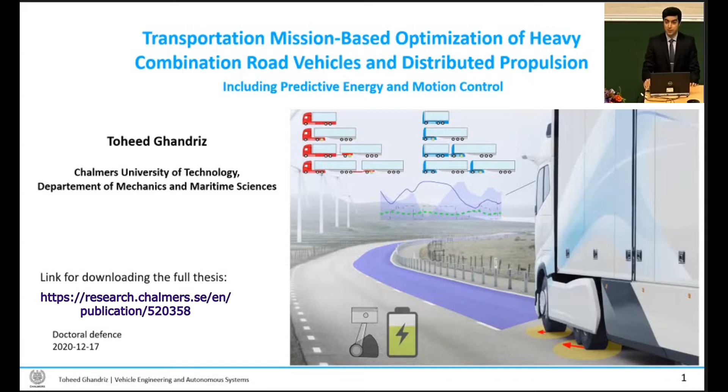The title of the thesis is quite long. Let's see what the thesis is about.

It is about road-heavy vehicles, which are powered by internal combustion engines using diesel fuel or by batteries using electric energy.

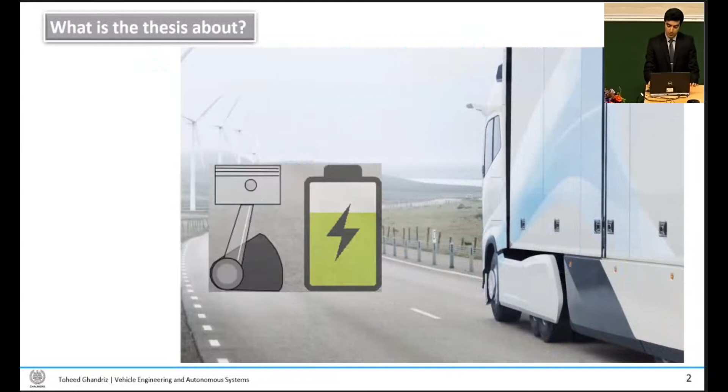They come in different sizes, driven by humans or by automated driving systems without human drivers. Electric-driven axles are allowed in any unit of these vehicles.

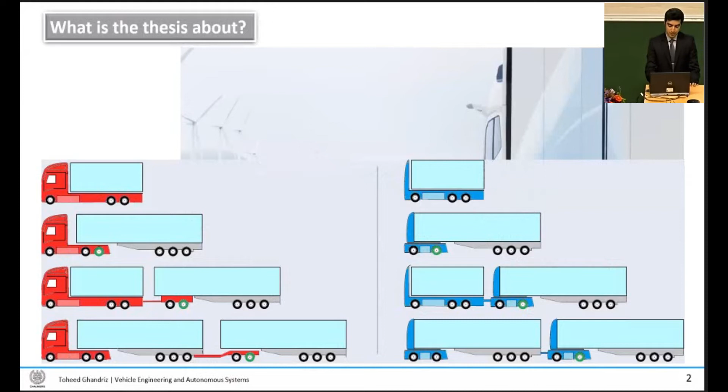These vehicles are designed in relation to the infrastructure and operational environment, and infrastructure includes charging stations and loading and unloading schemes.

This thesis considers optimal control of energy for these vehicles, where vehicles are aware of road elevation in front of them and decide optimally the velocity, optimal state of charge, optimal gear ratios, and transmission ratios.

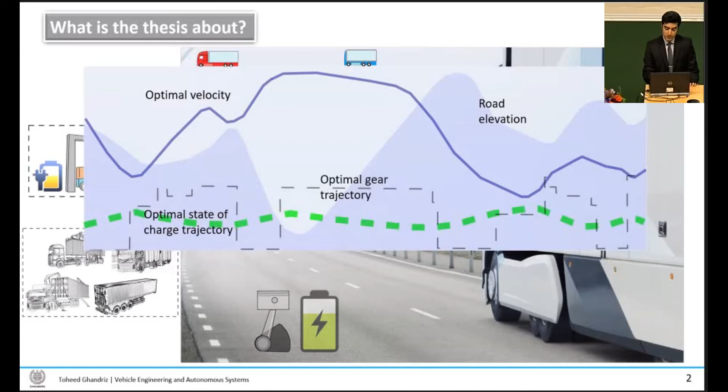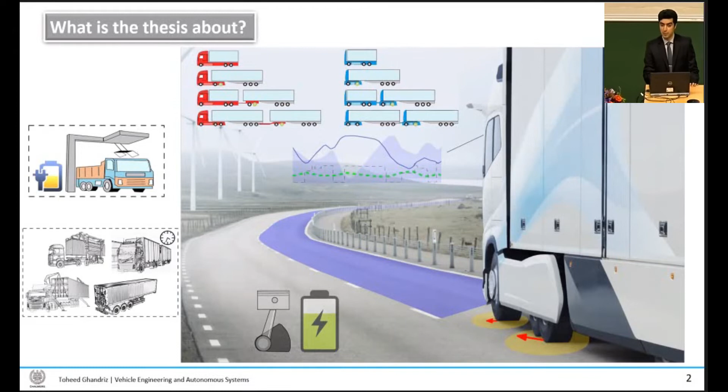The vehicles are also aware of the coordinates of the road, and they plan the distribution of forces between axles for each individual axle, with the purpose of motion control combined with energy management, or separately.

The main research questions can be formulated as follows: how the efficiency and profitability of road freight transportation can be improved when we allow electric drive units on any unit of the vehicle.

And how the fleet vehicle propulsion optimization is coupled with the operational environment and infrastructure.

Also, how can the longitudinal and lateral motion of these vehicles be optimally controlled, considering minimum energy usage and safety? These questions apply to both vehicles with a human driver and without a human driver, driven by automated driving systems.

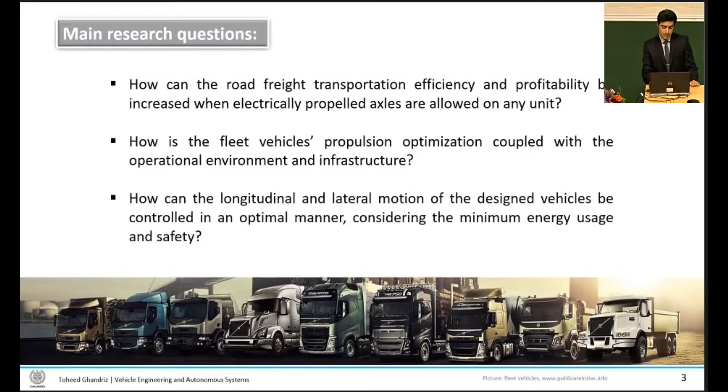Answers to these questions help us enhance road freight economy, transport, and energy efficiency, and road safety, which are the motivations of this work.

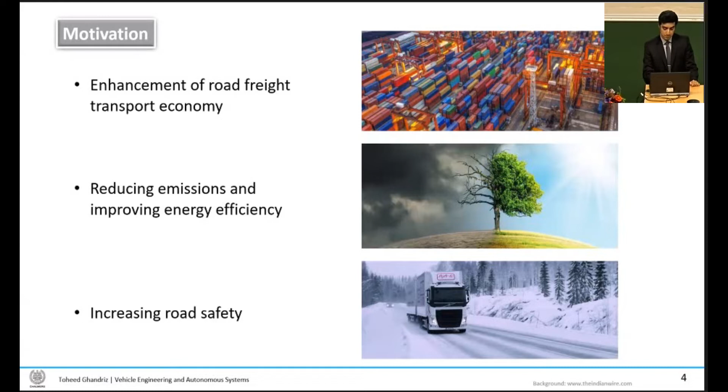Why is enhancement of road freight transport economy important? Road freight transport is responsible for about 75% of land transport in Europe, which is increasing.

This increasing demand, together with pressures from regulators to fulfill environmental standards, increasing customer expectations, and availability of new technologies, creates a competing market.

These pressures are in contradiction to reducing the cost of vehicles. On the other hand, having efficient, cost-efficient, and profitable businesses and vehicles is the priority here. So vehicles can be successfully accepted into the market if they show less cost and are cheap.

Two important sources of future revenue growth in the truck industry include new technologies and freight volume growth, and competitiveness of new transportation solutions depends on development and implementation of new technologies.

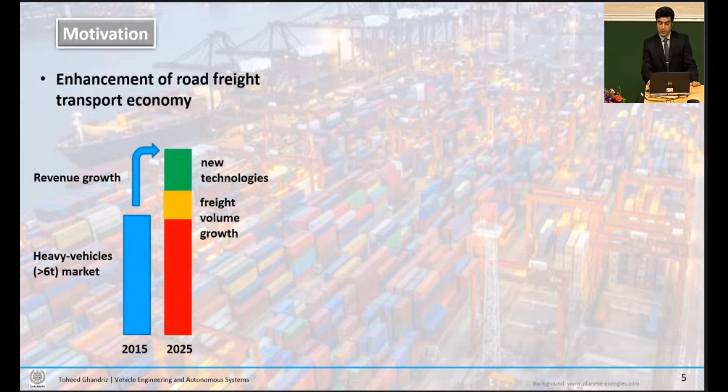These new technologies include vehicles without a human driver driven by automated driving systems, electrification and alternative powertrains and fuels with low prices, and also implementation and use of longer and heavier vehicles in transportation.

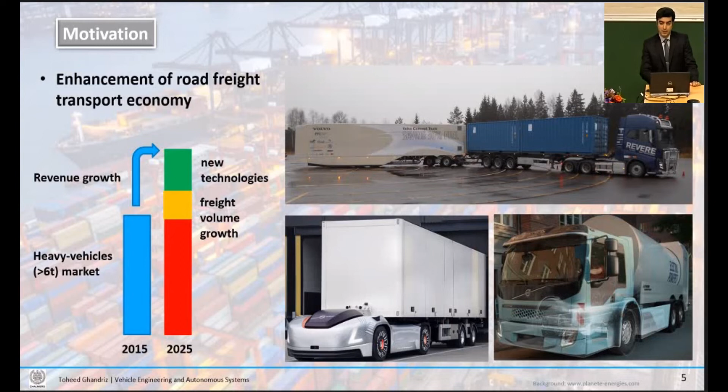Longer and heavier vehicles are good for a wide range of transportation assignments, and they are cheap and efficient per unit of freight transported.

There were two case studies performed in this thesis to demonstrate why longer and heavier vehicles are important and good.

Therefore, there is high utilization, and for high utilization, a vehicle with lower operational cost is the best choice, which in this case is a longer and heavier vehicle.

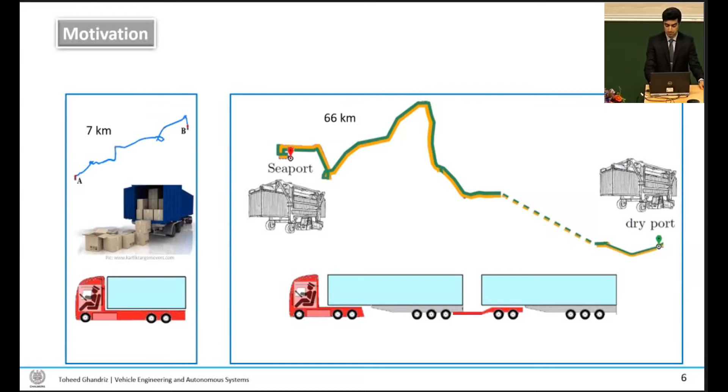Moreover, these emissions are increasing because of increasing traffic. Therefore, implementation of new transport solutions is important.

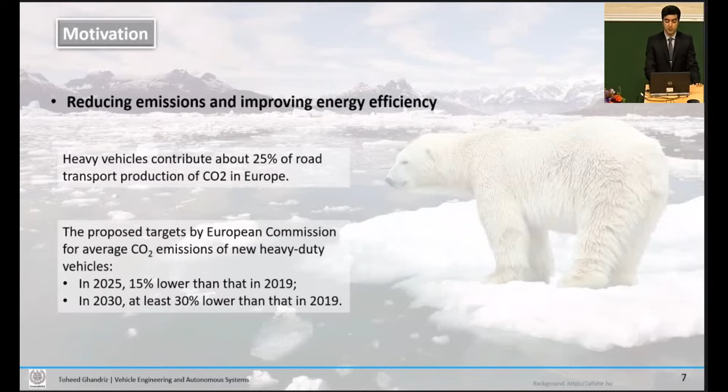Also, the dynamic motion of heavy vehicles and multi-trailer vehicles is different from passenger cars because they are heavier, longer, and have articulation joints.

And also, the critical situations created by these vehicles are more serious and different.

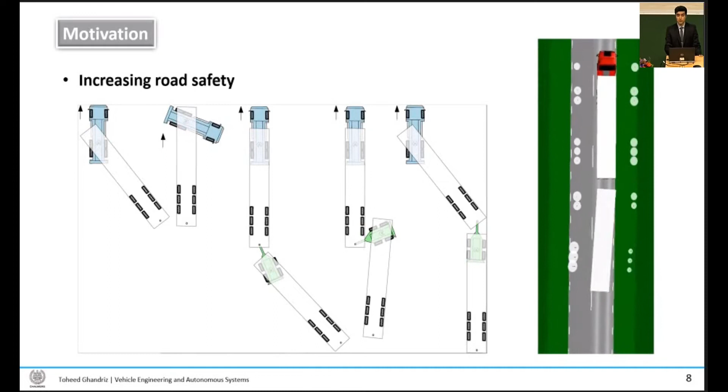That emphasizes the importance of developing new control strategies to avoid this situation.

To solve these problems and answer the research questions, this thesis used mathematical models and optimization methods. Mathematical models included total cost of ownership, models for multi-trailer vehicle lateral and longitudinal motion control, and simulation. Also modeling for powertrain, charging and battery state of health, operational environment, and operating cycles.

In the thesis, there were a series of optimization problems solved, including minimization of total cost of ownership, which was solved using derivative-free optimization because the cost is non-smooth and non-linear, and the design variables are discrete. Also, non-linear optimal control methods were developed for energy and motion control, solved using direct optimal methods and by converting them to linear programs, non-linear programs, and mixed integer nonlinear programs, which were solved by sequential programming. Also, for several problems in the thesis, dynamic programming has been used.

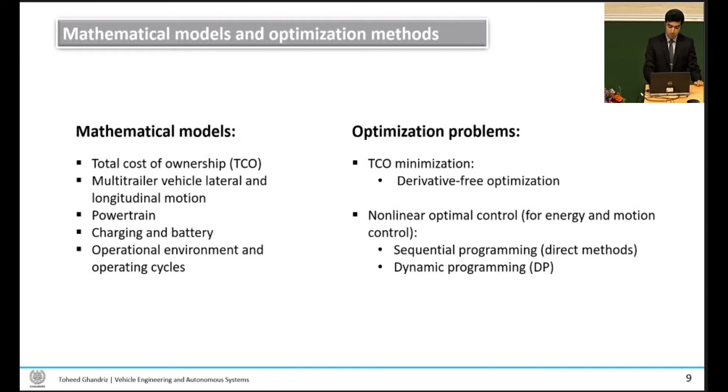The total cost of ownership here includes operational and depreciation costs. Operational costs included diesel fuel, electric energy, driver, vehicle maintenance, taxes and insurance, discount rate or interest, and transportation mission management system in case of driving automation and vehicles without a human driver.

Also, the depreciation of purchase price included vehicle chassis and powertrain components, as well as investment of infrastructure. TCO calculation also included the economic lifetime and rest value, which were different for different components of the vehicle. For example, for the last replaced battery, which might have a better state of health, the rest value was different.

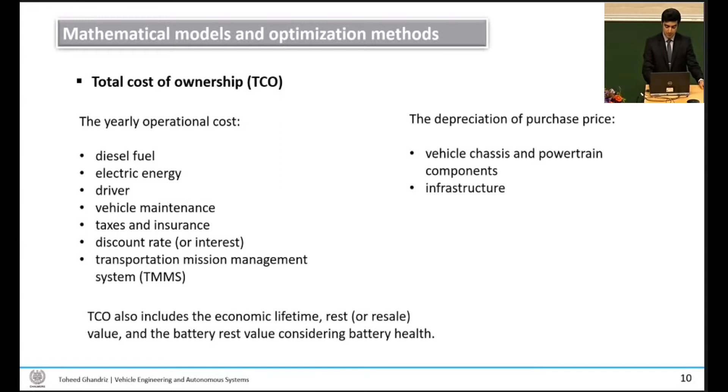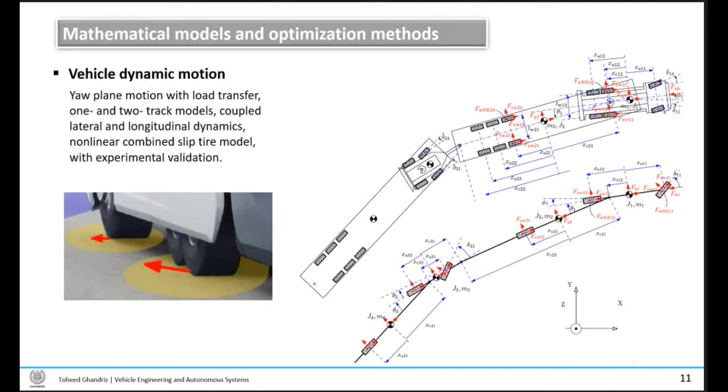Vehicle dynamic motions also needed to be modeled. In this thesis, vehicles with 1 and 2 track models were used. The important dynamics that needed to be captured were actually coupled lateral and longitudinal dynamics with nonlinear effects of combined slip tire models, which were needed for combined optimal control of lateral and longitudinal motion. As we can see in the right figure, there is a schematic of these figures, 2 track and 1 track, where 1 track is simpler and shows very close dynamics to the 2 track models.

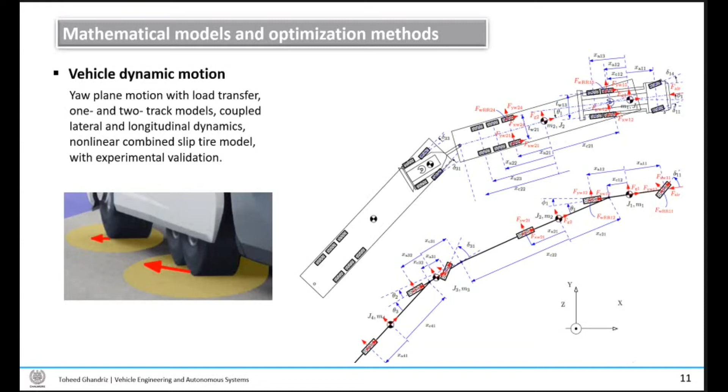This resulted in very large differential algebraic equations, which were validated using measurement data. The measurement data were obtained using this vehicle, which is an A-double consisting of tractor, semi-trailer, dolly, and semi-trailer.

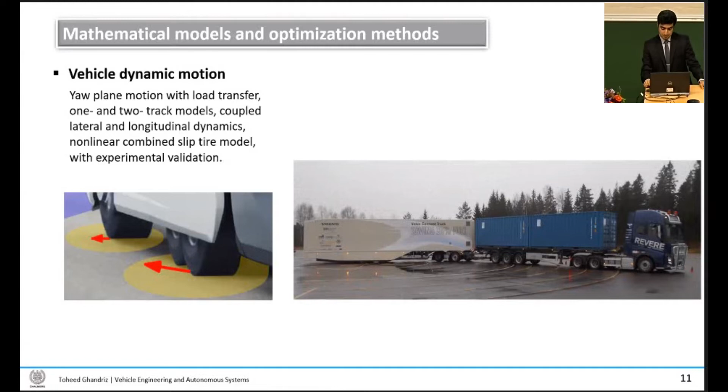The simulation results and measurement results showed a very close relationship, and here you can see an example of yaw rate for different units in a braking curve maneuver, which are quite close in relationship and acceptable for our purpose in this thesis.

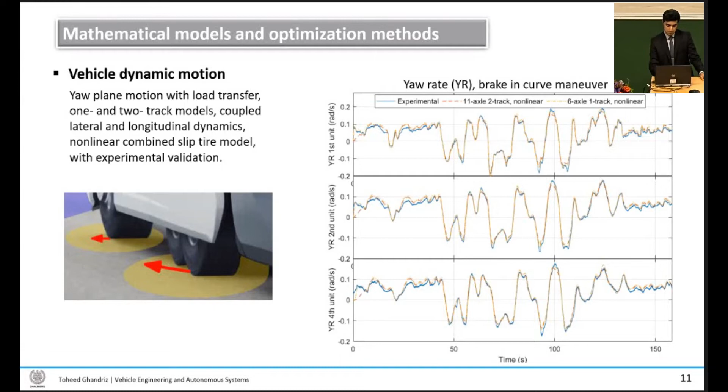Moreover, the thesis needed to develop powertrain models for conventional, battery electric, or hybrid powertrains. Here you see a schematic of the parallel hybrid powertrain. Each subsystem of the powertrain has its own power losses and energy losses models.

For example, we use here efficiency, which was measured for these components for the internal combustion engine and electric motors, together with limits on the torque as a function of speed of these components, which were used for evaluating the power loss.

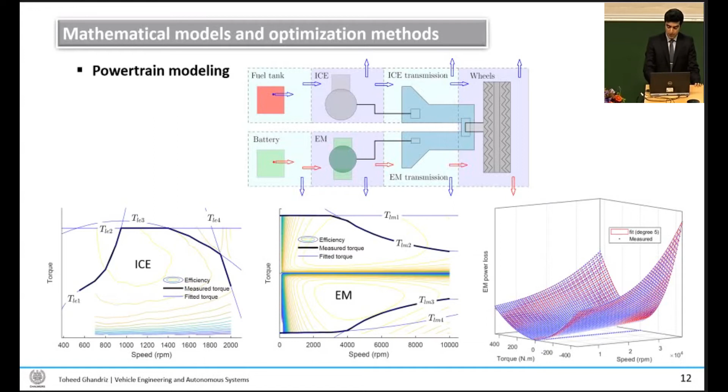Also, operational environment and operating cycles needed to be modeled, which include a transportation network roadmap consisting of routes, customer locations, and topography of routes, including elevation, coordinates, and curvature, which were obtained either directly using available maps or by performing measurements.

A well-stated problem is a half-solved problem. If we have a good description of the system dynamics and operational environment, and we know how to solve the nonlinear optimization problems, then we can handle a series of different optimization problems with different cost functions and constraints. The challenge is, however, how to handle them efficiently and in real time, if they need to be handled in real time.

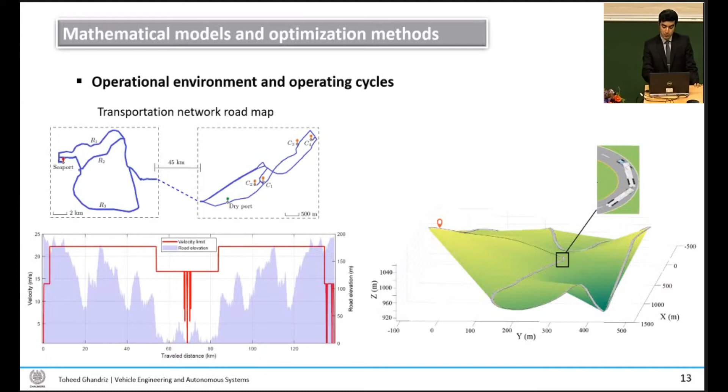As an example, we see an optimization problem here, which tried to answer the first two questions: integrated vehicle infrastructure design. The first two research questions were how to improve the efficiency and profitability of the transportation solution using electrification, and how it is dependent on or relates to the infrastructure.

Here, the design variables are vehicle types, vehicle components, and infrastructure. The vehicle components included choice of powertrain source of power, for example conventional, full electric, or hybrid, and then the size and type of electric motors and their location and number of driven axles, type and size of batteries, and size of the internal combustion engine.

The infrastructure included charging stations and loading/unloading schemes at each node of the transportation network. The objective is to minimize total cost of ownership, and the constraints are vehicle model constraints, which include system dynamics, powertrain limits, and performance constraints, setting minimum requirements on torque and power, for example for handling required startability and gradability, and transportation task constraints, which ensure fulfillment of freight pickup and delivery demands at each transportation network node and customer location.

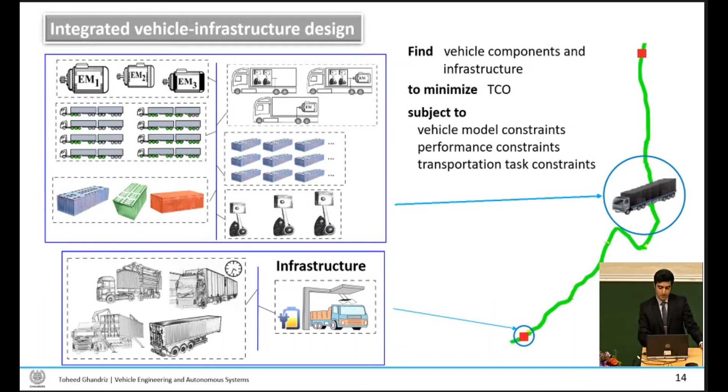This vehicle infrastructure optimization problem was solved for different scenarios to understand the competitiveness between different transportation solutions. These scenarios varied in, for example, the type of power source, conventional or battery electric, the size of the vehicles, and whether they are driven by humans or by automated driving systems without humans, and also parameters of the driving cycle, such as the length of the route, the hilliness of the route, and the optimal speed.

Relative sensitivity analyses were also performed against contributing factors such as the price of fuel, price of electric energy, and the price of the battery, among others, which resulted in the generation of a very large dataset, which was then used for studying the competitiveness between different transportation solutions.

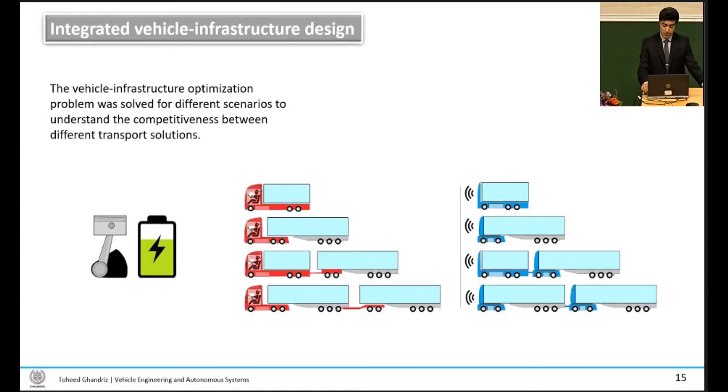As an example, using the analyzed data, we show here why longer and heavier vehicles are important and good. Assume we have four types of vehicles with different sizes: the first is a rigid truck, then a tractor semi-trailer, a Nordic combination, and the last one is an A-double.

Assume we have enough load to fill the first vehicle, the smallest one, the rigid truck, while the other vehicles are only partly filled. In that case, the smallest vehicle shows the lowest total cost of ownership per unit of transport.

But now assume we also have enough load to fill the tractor semi-trailer. In that case, the total cost of ownership per unit of freight transported suddenly drops, because we transport twice as much freight but with only a slightly increased operational and investment cost. Further, if we have enough load to fill the other vehicles, the larger the vehicle becomes, the more the total cost of ownership drops.

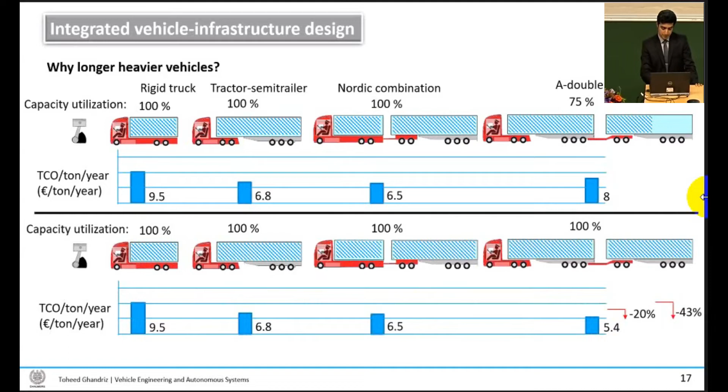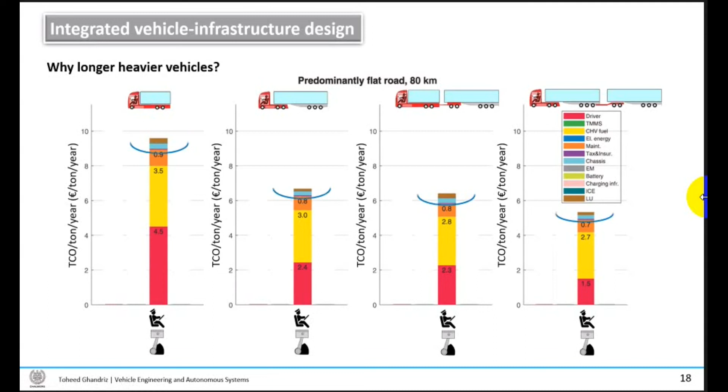And the depreciation of the investment cost in these vehicles—because conventional vehicles with human drivers actually form only a small part of the total cost of ownership—makes these vehicles somewhat insensitive to utilization.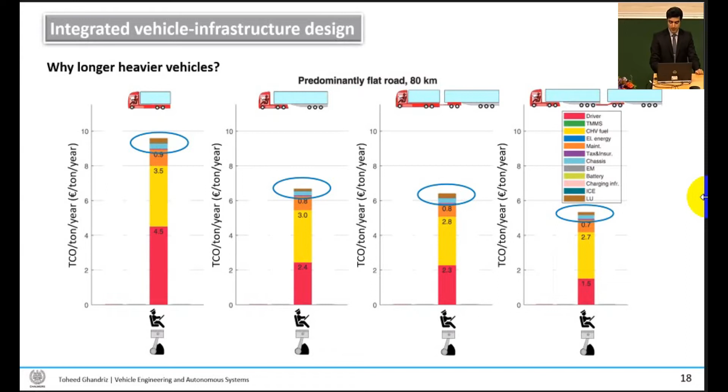If we electrify these vehicles, we replace the cost of fuel with the cost of batteries, charging infrastructure, and electric energy. This adds to the investment cost and reduces the operational cost. In that case, it makes these vehicles more sensitive to utilization.

And also, for this particular example, which is the road with an 80-kilometer length, the electric vehicles cannot beat the conventional vehicles unless the cost of infrastructure is removed from the TCO calculations.

Moreover, there is a misconception, usually stating that electrifying big vehicles is not good because they need big batteries. This is basically true only for transportation with low utilization. If we have high utilization, big vehicles actually need smaller batteries per unit of freight transported, as can be seen here.

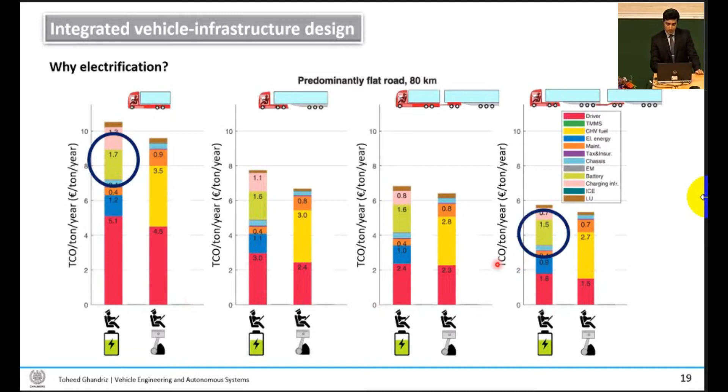So what happens if we automate these vehicles? We remove the driver cost and replace it with transportation mission management cost and equipment cost. If these vehicles are highly utilized, the cost of automation is less than that of drivers, and these automated vehicles become more competitive.

And if we automate the electric vehicles, there is also a reduction in cost, and this reduction is higher for electric vehicles compared to conventional vehicles. This is due to more efficient driving, which requires smaller batteries, and also smaller batteries because we don't need batteries for driver-related equipment such as heating and so on.

We also added to the investment cost and reduced the operational cost. These vehicles show different sensitivity to utilization, which is a very important factor here.

If we have 100% utilization, electric vehicles without human drivers show the lowest cost. If we reduce utilization, then conventional vehicles with automated driving systems show the lowest cost. And if we reduce utilization further, conventional vehicles with human drivers show the lowest cost.

That shows that different transportation solutions show different sensitivity to utilization, and also other cost factors, for example the cost of batteries, electric energy, and fuel. All this data was analyzed, and comparisons of different cases are provided in the published papers.

These data help us answer different questions about transportation solutions. For example, which size is good for a given transportation task, whether it's good to automate it or electrify it, and what the sensitivity is to contributing factors.

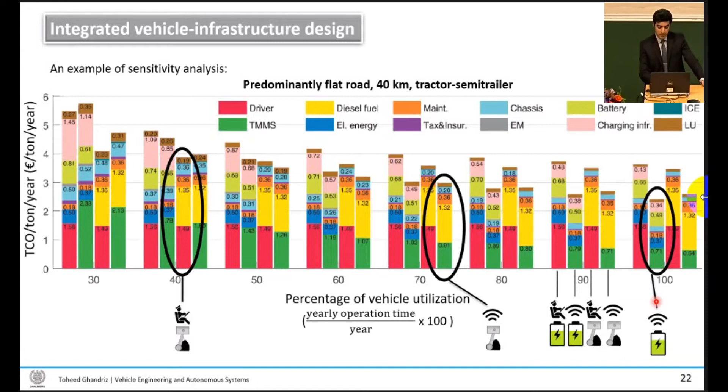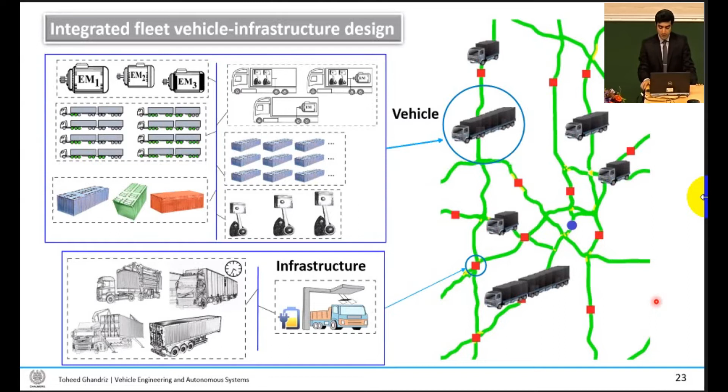So this was the example when we optimize a single vehicle. This problem can be extended for a fleet of vehicles when we perform integrated fleet, vehicle, and infrastructure design. Here, the solution is optimized fleet infrastructure, which was performed for a small transportation network in this thesis, because the optimization problem is very large with billions of possible combinations.

Here, the fleet comes with vehicles of different sizes and numbers, and also different powertrains, which work in optimum missions found by solving the optimization problem. Also included are the location of charging stations and charging power, the loading and unloading scheme, as well as the number of trips each vehicle needs to perform to satisfy the transportation demand of the whole network.

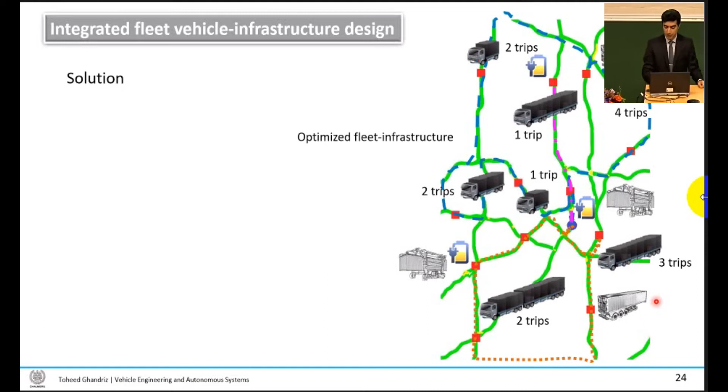Here is an example of why coupled optimization of fleet, vehicle, and infrastructure is important. Assume we have only a single vehicle in our fleet. Then the optimizer sees that it's better to have a vehicle with a large battery size rather than fast charging stations, because it is cheaper.

But if we have two vehicles in the fleet, then suddenly fast charging stations become viable, and vehicles can have a smaller battery size. This clearly shows the relation between infrastructure design and vehicle powertrain design in the case of electric vehicles.

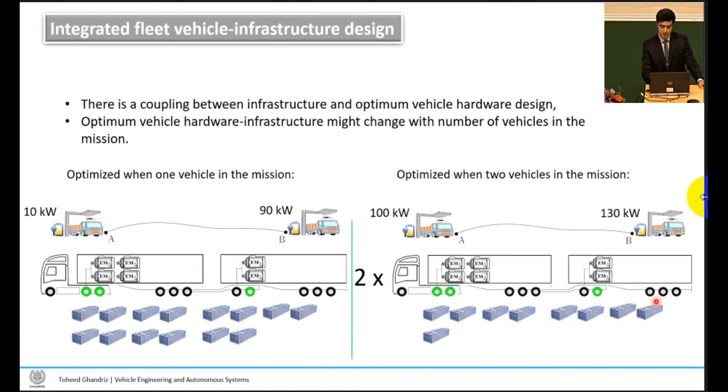So we have seen that long and heavier vehicles are good for a wide range of transportation assignments. In these vehicles, distributed propulsion on different axles may appear for the sake of energy efficiency and increasing power.

But this kind of design creates a critical situation in some parts of the road. For example, the rear units might push the front units, or the brake forces might not be evenly distributed, for the sake of energy efficiency. This critical situation needs to be handled.

This comes to the third research question, which is how to optimally control the longitudinal and lateral motion of these vehicles to assure safety and also energy efficiency. For that,

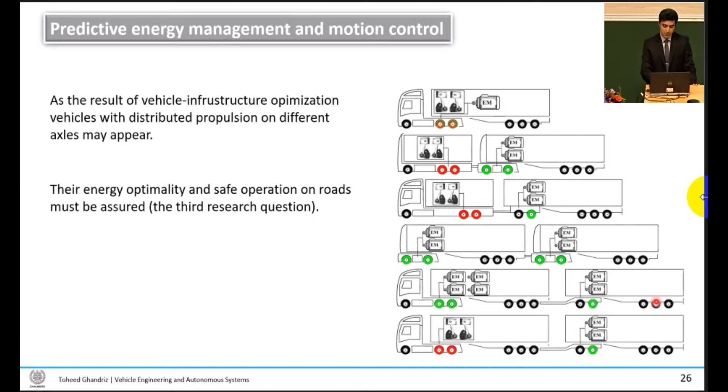nonlinear optimal control problems were defined in this thesis. The unknown design variables were trajectories of power of the engine and electric motors, transmission ratios, forces on different axles,

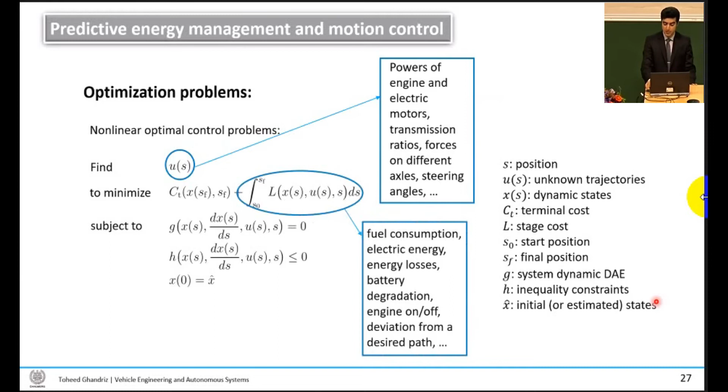and steering angles, depending on the problem at hand, with a cost function which included fuel consumption, for example, or electric energy losses in different parts of the powertrain, battery degradation, engine on-off, deviation from a desired path, also depending on the problem studied. Here, the constraints include system dynamics, powertrain limits, trip time, and possibly others, also depending on the problem studied.

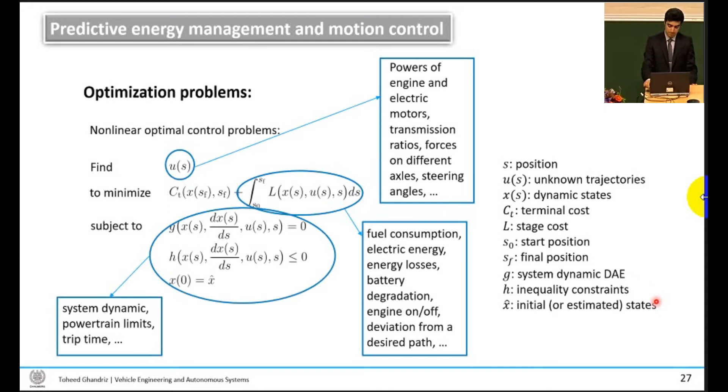So what is predictive energy management, basically? Predictive energy management is about using information about the future of the transportation or future of the road to control the vehicle now. For example, to avoid unnecessary braking, or to save electric energy and use it later when it is really needed.

What happens if such a limit is not considered, if we don't reduce the vehicle speed based on the curvature of the road and lateral acceleration? A critical situation might happen, as shown in this animation, which is a rollover.

Here, the subject vehicle is an A-double, which is driven in the second axle of the third unit, which is the dolly, and the first unit is driven by a conventional engine.

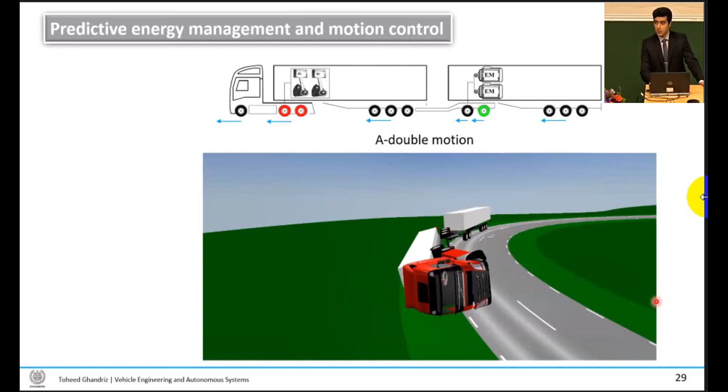So is it enough to limit the speed only based on lateral acceleration and curvature of the road?

Here, another case is shown where the speed of the vehicle is limited based on curvature during predictive energy management. But we still see that a critical situation happens and the vehicle becomes unstable, and the dolly and the last semi-trailer go out of the road. This happens because optimal energy management sees that it needs to reduce the speed by using regenerative electric braking of the dolly.

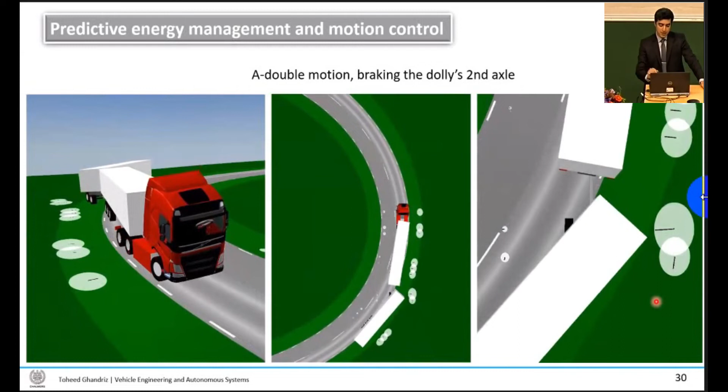This happens because of complicated nonlinear properties of the tires. Basically, if you brake in the X direction, or longitudinal direction, you lose force in the Y direction, or lateral direction. That's why the tire cannot tolerate the lateral force, and it goes to the right, and the vehicle becomes unstable. Therefore, nonlinear properties of the tire, combined with slip, need to be taken into account during optimal energy management. For example, the total force needs to be limited, and we need to make sure the total force stays within this yellow ellipse shown in the top picture.

And then also considering the combined slip effect, here is shown the relation between lateral force and longitudinal force. The controller should make sure that the forces always stay in a green region, which is a constraint region for the whole horizon or part of the horizon.

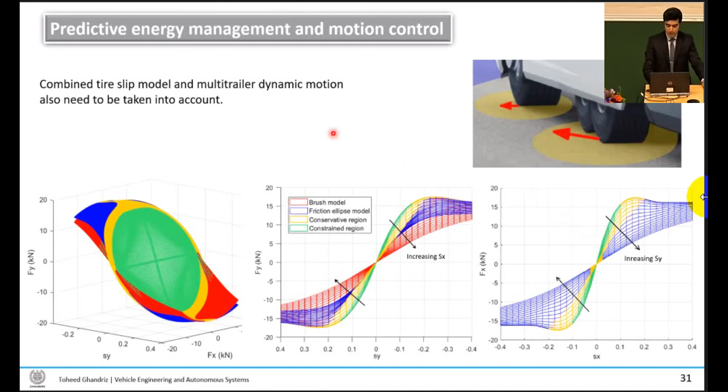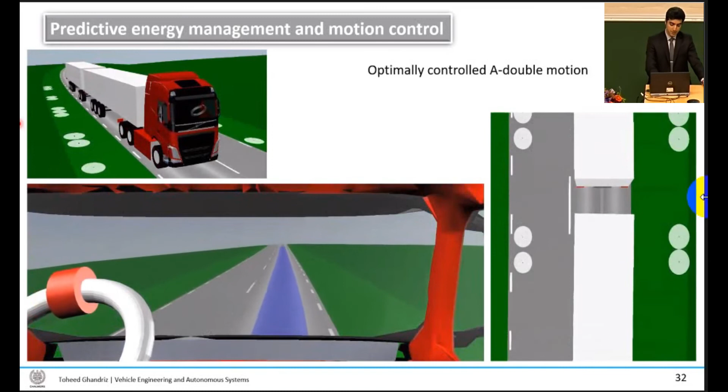This is a new result when lateral stability constraints are included. We see in the first part of the horizon, which is about 400 meters, these constraints are active, and it causes a reduction in speed and distribution of forces between axles.

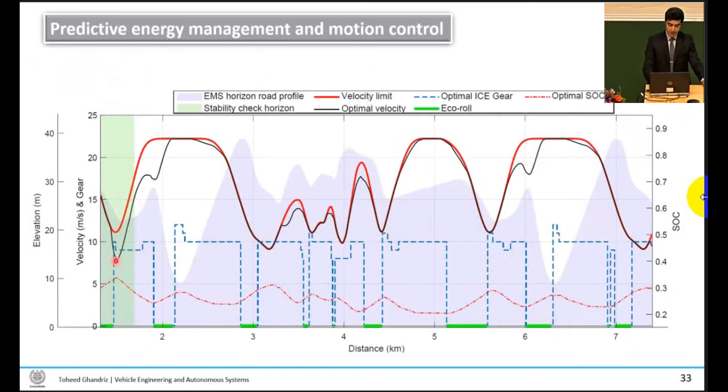Here, an example is shown for the lateral force trajectory of the driving axle of the dolly. We see in the first case, with the blue curve, which is the lateral force, is in an unstable region. For stability, this curve should stay in the white region, and the force of the electric motors should not reach this pink area. In the second case, when these are included in optimal control management, the trajectory stays in the white region and makes the vehicle stable.

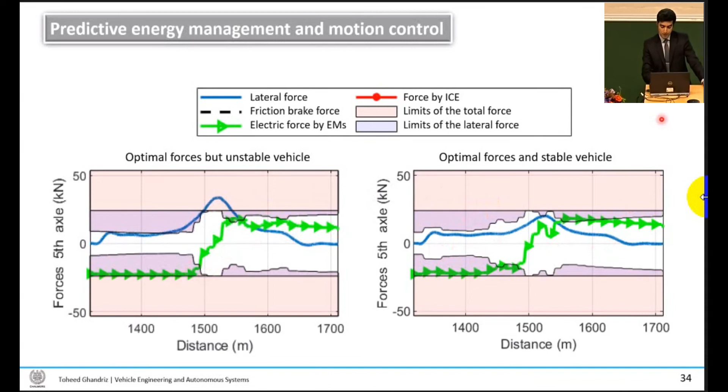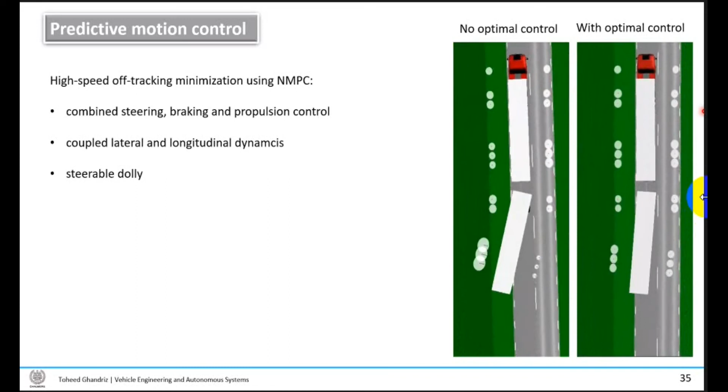Here is another example, which is minimization of off-tracking without the concerns of energy efficiency. The objective is to minimize off-tracking by using nonlinear model predictive control, similar to before, with combined steering, braking, and propulsion control, and by optimal distribution of forces between axles, where here the dolly is also steerable. The vehicle is aware that it's going to change lanes and plans these forces in an optimal manner in order to ensure safe motion and reduction in off-tracking.

So this thesis resulted in several publications and two patent applications, and the main contributions are listed in this slide.

This thesis tried to develop methods for increasing road freight transportation efficiency and profitability by designing the vehicle propulsion system coupled with infrastructure design and operational environment. Also, the thesis demonstrated the relation between automation and electrification in different transportation assignments and scenarios, and also identified zero emission profitable solutions.

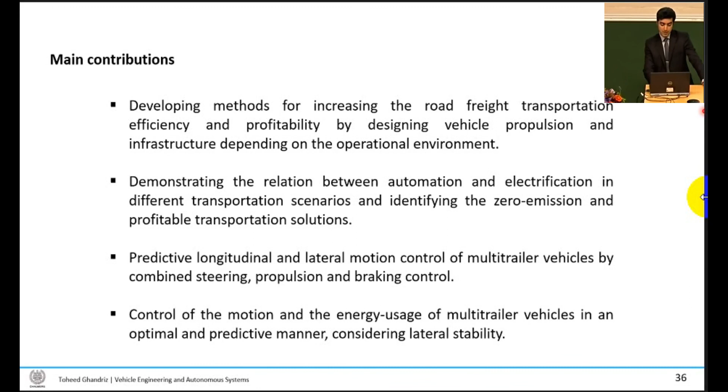The thesis tried to develop methods for predictive longitudinal and lateral motion control of multi-trailer vehicles by combining steering, propulsion, and braking in long horizons, and also developed a methodology for controlling the motion of the vehicles, considering the energy usage of multi-trailer vehicles, in a predictive manner, considering lateral stability. The main conclusions are that there is a coupling between vehicle hardware optimization design, routing, logistics, and infrastructure, and they need to be handled in an integrated manner.

Also, profitable, efficient, and safe road freight transportation can be achieved by optimizing the vehicle and infrastructure and simultaneous optimal control of energy usage and vehicle motion on roads. So that was all, and thank you for listening.